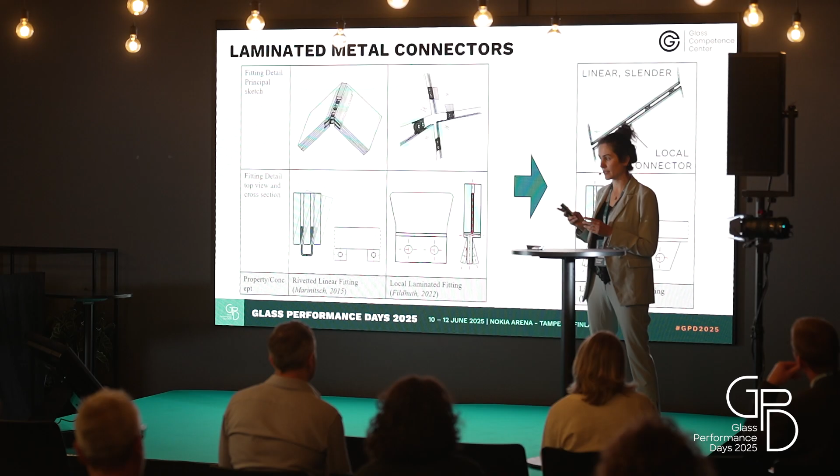Of course, we're not the first to come up with that concept. There are many others who already thought of how to transfer load between glass elements by laminating something into it. One of them was Stefan Marinitsch. Back in 2015, he proposed a linear fitting, riveted, and he integrated the linear metal fitting into both interlayers of a triple laminate. On the other hand, Timo Fildhuth and his colleagues proposed a local solution, using milled, dovetailed elements locally laminated into the glass to provide a meeting spot at glasstec about 3-4 years ago. We actually took inspiration from both approaches, wanting to keep the linear clarity of Marinitsch's concept, but also have the simplified installation possibility of the local connectors.

Here's an impression of a mock-up we built halfway through our project. It shows that it's visually appealing, but also, due to our local connections, we had simplified positioning throughout the lamination process, and also during the installation process.

Now I want to quickly lead you through our development process, which led to the final design. The basic concept: we have the two laminates and a T-shaped bar laminated into the interlayer. We also wanted to use the edge and activate the structural capacity to transfer loads through that edge adhesion with PVB. It may seem like a simple concept, but actually we had quite some challenges.

One challenge was geometric constraints. Architects often want to have a clean, clear, slender look. And even if we thought, okay, we want to be able to implement it in several shell geometries, having different angles in the shell, we still needed a uniform visible joint width.

Moreover, of course, we needed to understand the structural performance of the fitting: which loads it can take, but also what happens if something occurs and we need alternative load paths, and how failure occurs. Of course, thinking in 2022 when the project started, it wouldn't have added value if we didn't also think of the thermal performance. That was also an aspect, not the focus of my presentation, but something we incorporated in the investigation.

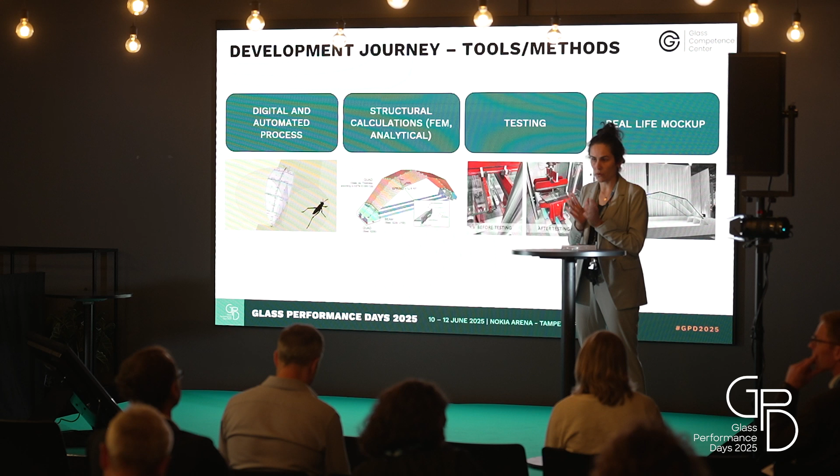So we used a parametric model to enable us to have a digital workflow from early form finding through to fabrication, also directly linked to structural calculations.

We needed tests to understand the material properties and the failure modes. And in order to be able to understand where the challenges lie when you really want to build it, we also built a mock-up.

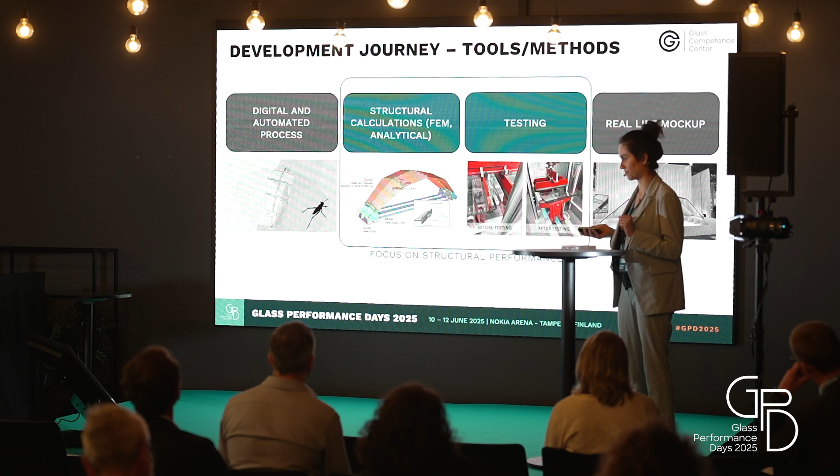As I don't have too much time, I will now focus on structural performance. Early on, we asked ourselves, what does our geometry have to look like, or how are the dimensions to be able to take lots of loads?

We performed studies on that, first having simplified calculations analytically, and we looked at different parameters, specifically different stiffness parameters. One was the rotational stiffness, and we looked at the effect of flange or web thickness, glass thickness, or thickness of the interlayers.

What was interesting, for example for rotational stiffness, is that there are some geometry factors like the flange thickness which have quite a huge impact. So something we could play around with, and others, like web thickness, not so interesting.

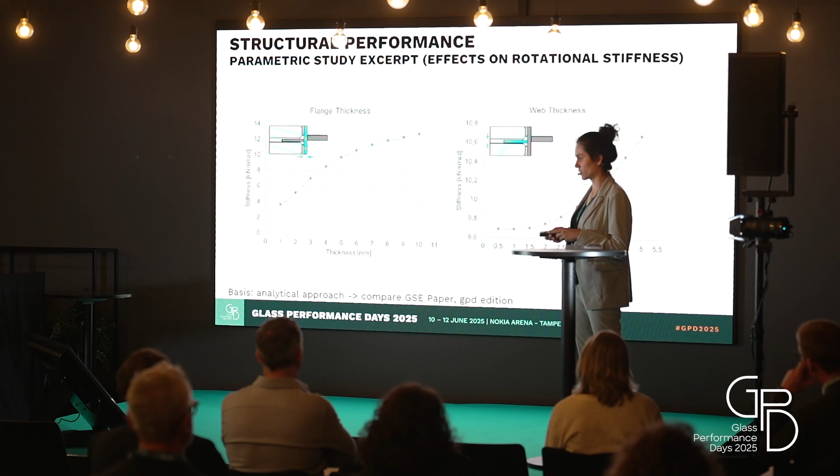We also needed, for designing shell structures, to think of simplifying things in a global model. So what we did, as we had local fixation points, we represented them with spring elements, having always 4 spring elements: representing axial stiffness, 2 shear stiffnesses parallel and orthogonal to the edge, and also the rotational stiffness.

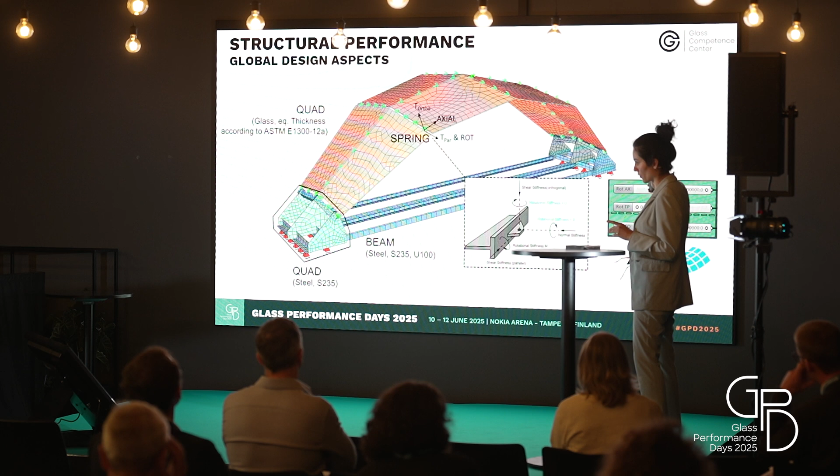Since we also wanted to have it parametrically, we had a link between our parametric model and the calculation software. This brings me to the next step, because of course you will ask, okay, what parameters to put into the model? So this brings me to testing.

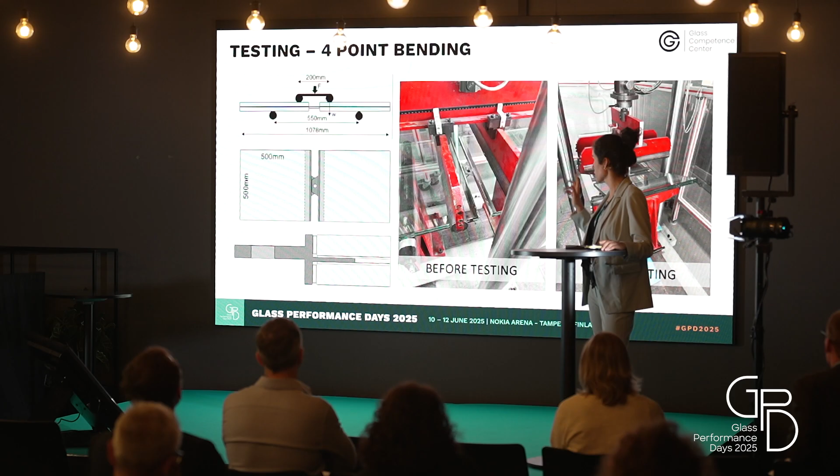Here as an example is the testing of our rotational stiffness through a 4-point bend test. We had some specimens and performed the tests, and what we found is quite interesting.

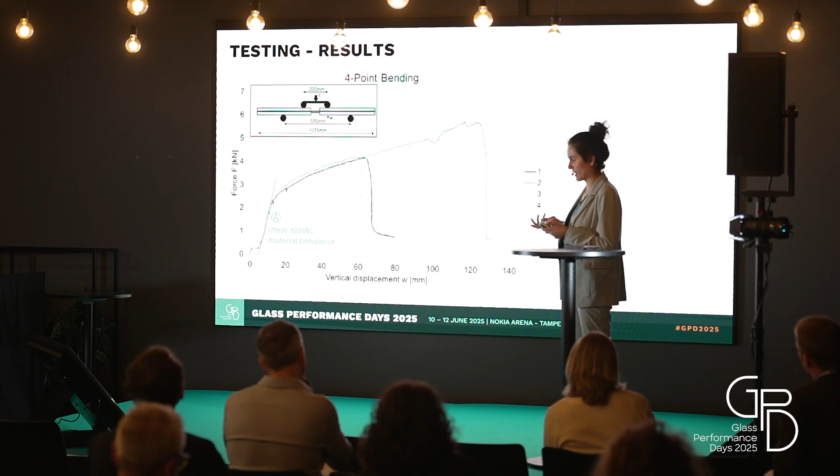As you may expect, we do have several regions. We have a linear elastic material behavior region, which is typically the one we're interested in for the design. When we go a step further, we interestingly see some plastification of the local thing called the bracket.

So we actually have a plastification of this area and nothing happens in the laminate or the glass, which is quite nice because it's a ductile behavior. So if something would happen, we would actually be aware of it because we see that it happens.

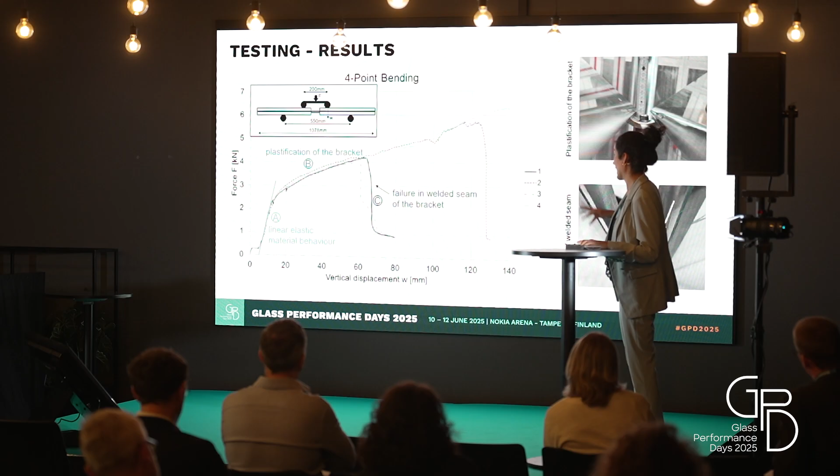In the end we have failure, and we have failure at different levels. What we found afterwards, interestingly, was that unfortunately one of those really robust laser welded seams broke. We wanted to understand that better.

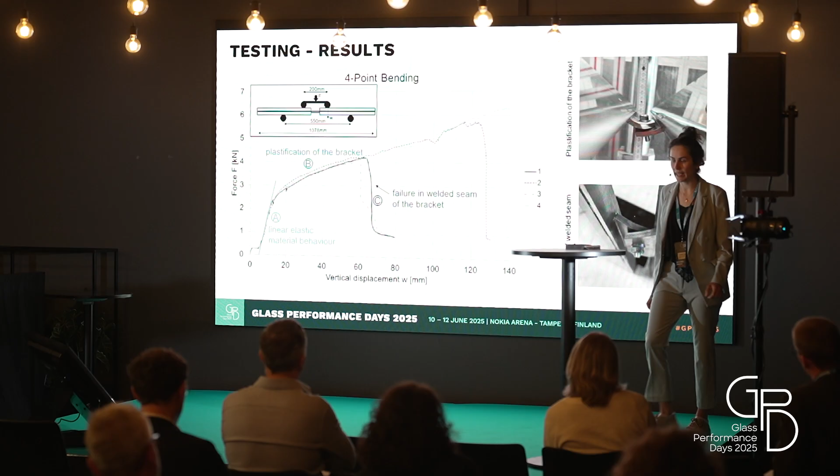I have one bracket or one fitting with me. So in order to understand what really happened or what was the cause, we polished the cross section. What we found was that the manufacturer we worked with performed an okay job, but still they just had very tiny welds.

In order to make sure that for us, even if we stay in the linear elastic regime with the design for unexpected loads, we wanted to be sure that if we want to build something afterwards we have some safety. So we asked them to actually really increase those laser welds.

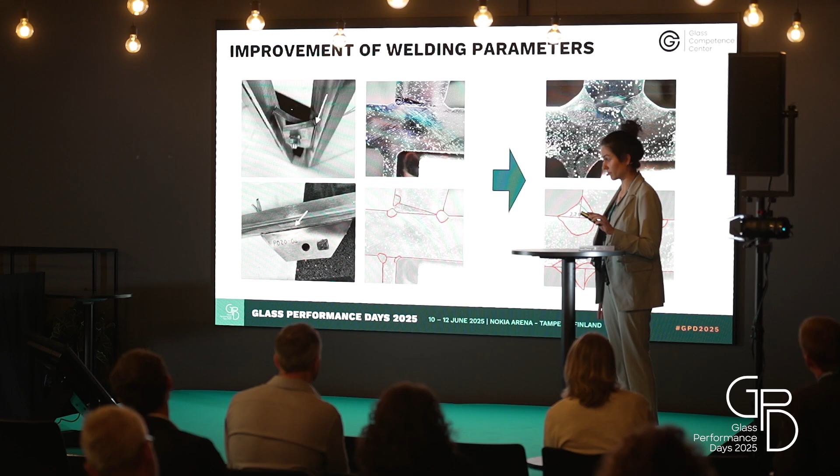In the end, actually, for us, for the mock-up, that worked. So here you can see some impressions. Since it was halfway through the project, we had special focus on structural performance, but we already also thought of a mock-up which shows or suggests how the connection could look like for further thermal tests.

This brings me to the end of my presentation, where I wanted to share what for us were the most important learnings, but also what our next steps are or what we're doing at the moment.

Our biggest learning was: do not do such a project without an experienced partner in metal processing. As we didn't have one in our team, it was quite challenging to find someone who really did what we wanted him to do. And maybe what you saw from the test results, not always does it give the same results, so controlling the laser welding process still has huge research potential.

What we're doing at the moment at TU Darmstadt is preparing some thermal performance tests in order to understand the thermal properties and weak spots of the connection.

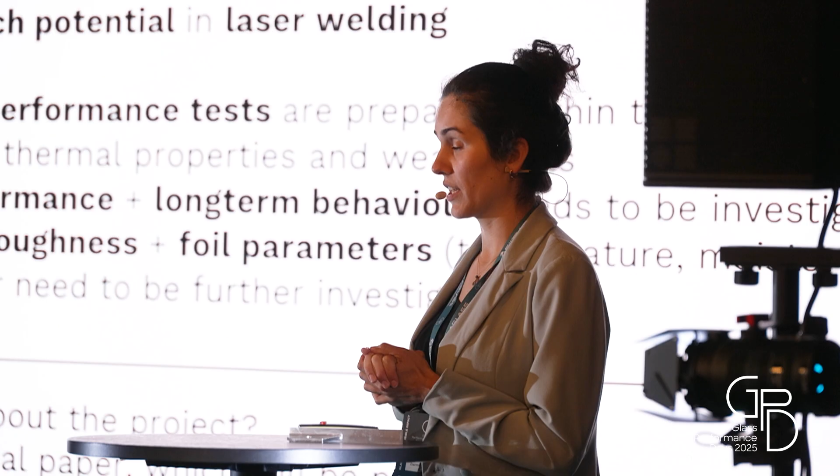What still needs to be done, in my opinion, are post-fracture performance and long-term tests. I think this is always, when it comes to research and money goes out, something we aim at but haven't been able to perform yet.

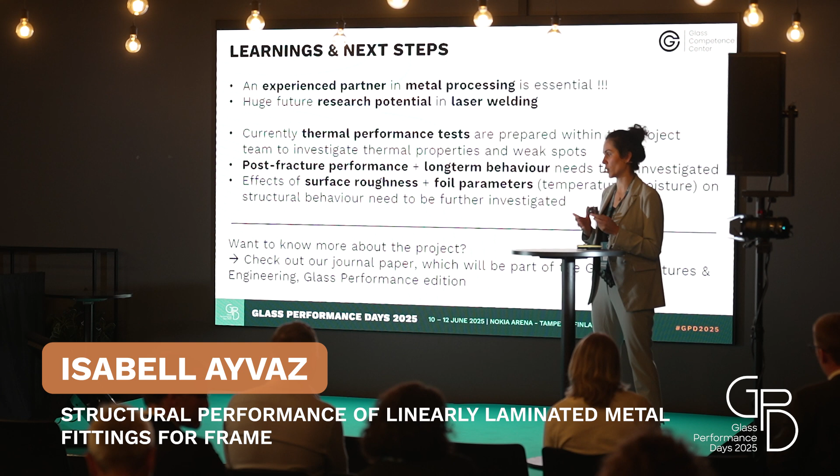Also, due to that welding process and the manufacturing partners, things we need to do are still think about what surface roughnesses we need, and what moisture and, of course, temperature of PVB will do to our overall structural behavior.

It was just a little insight for now. If you have more interest, we have a journal paper at the Glass Performance edition of the Glass Structures and Engineering Journal. Anyhow, if there are any other questions, I am happy if you come to me afterwards.